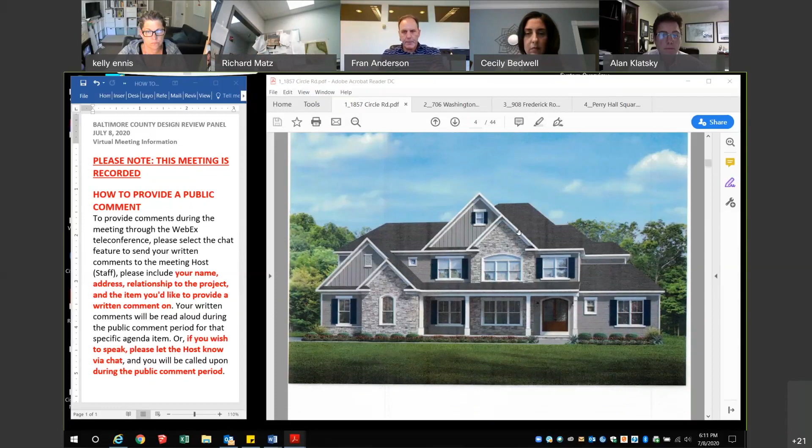So this is the view from Circle Road. You can see the driveway at the middle left-hand side of the screen. The driveway comes into the property, and that house was the original house on the property.

One thing I would like to point out is that as part of the minor subdivision and all the requirements Baltimore County is requesting, we are planting about 50 trees in this area as a forest buffer from the road to the stream, which you can see in that little dip. It's a very, very small stream, but that whole area is going to be planted with trees. So I can't imagine you'll ever see the house that's actually being built on the property because of all the screening that's being put in.

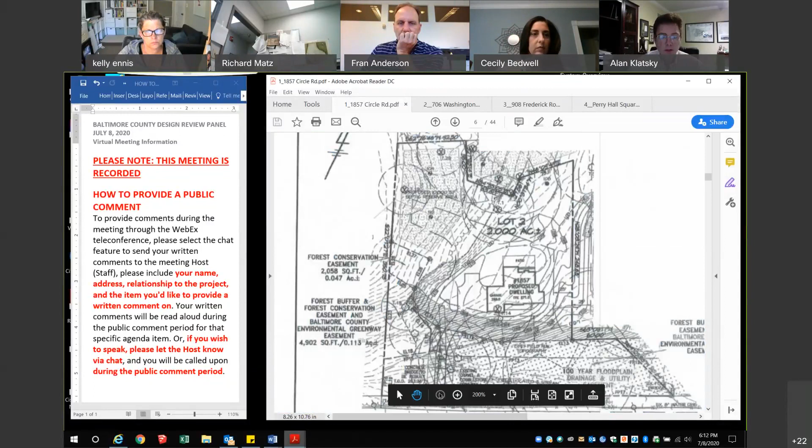Next slide is just a blow up again of the same thing.

Then we go to the house plans. I don't know if the panel has any comment about the plans. I know that you all had an opportunity to review. So again, we have very nice articulation, some arched windows, beautiful front doors, lovely shutters.

You can keep going, Martha. The garage will be entered on the side of the house, on the left-hand side. You can continue, Martha, and then we get into the floor plans. I don't know that the panel has any interest in the floor plans. It's a lovely house. You can continue through, Martha.

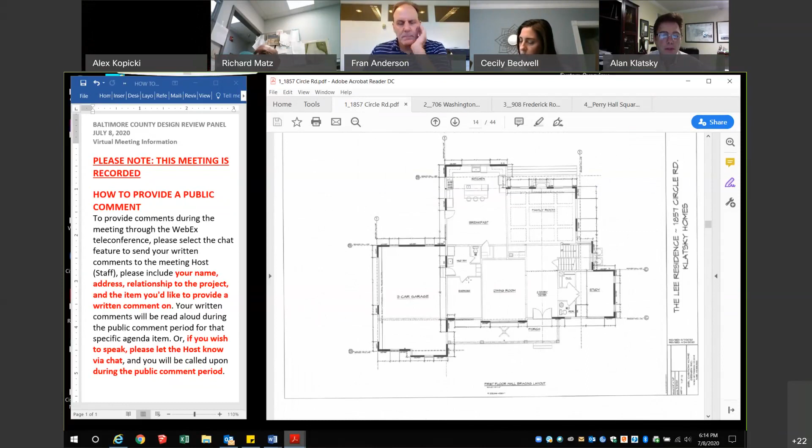Basement plan. Next. First floor plan, covered porch. Next. Upstairs floor plan. Next. Some more detail about the ceilings. Next. Again, just more detail. You can skim through the rest of this package, Martha.

Then the landscape plan was actually prepared by the homeowner. She worked for a landscape architect firm. So again, there's going to be a tremendous amount of planting as part of the forest conservation plan. And she has thrown in all the various colorful plants along the front of the house.

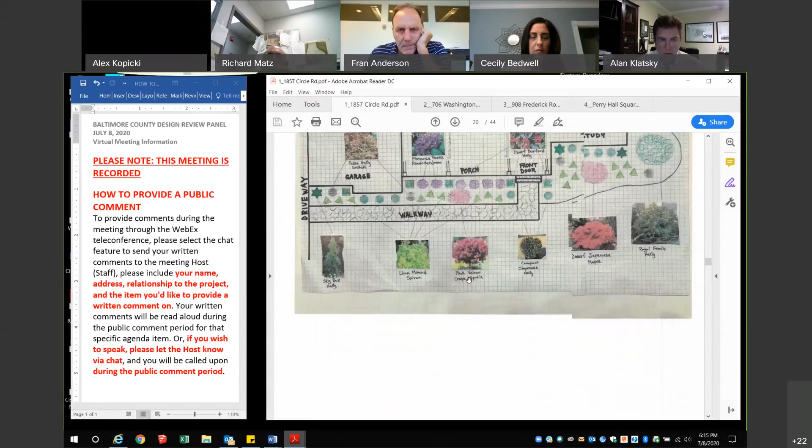And the siding is a HardiePlank type of siding. Here it's just shown in the traditional lap, although we're doing the shake, but this shows the color. It's known as granite gray. Next. This just shows the style of the siding, the board and batten, and then you can see at the top the shake style. So it's going to be a mix of those two types of siding.

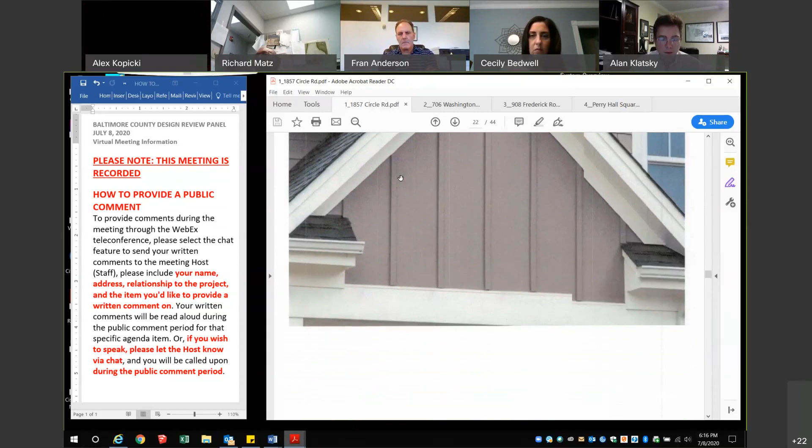And then next shows the design of the shutters, not in that color. The color is shown on the next slide, that will be the color of the shutters. And the next slide shows what the garage doors will look like.

And the next slide shows the roof shingle. They call it pewter gray. It's a very dark charcoal color. Timberline, high definition. It's a beautiful shingle. I've used it many times. Next.

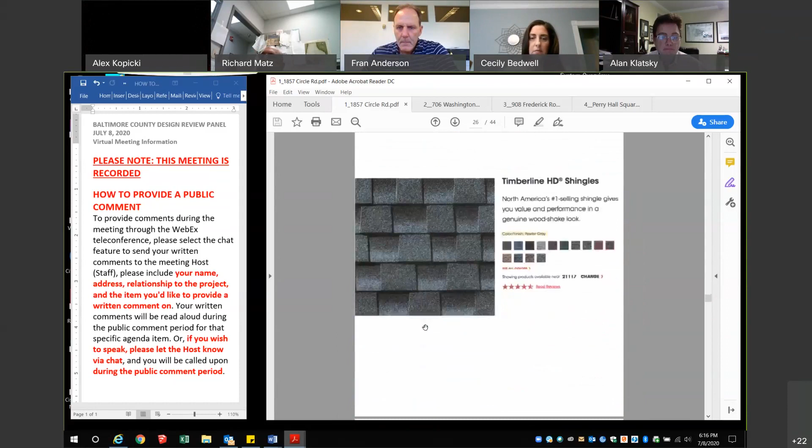So this is the picture from my neighborhood, and it shows what the property looked like when I bought it. You can see the 3 homes and the 3 addresses of 1857, 1859, and 1861. Again, all of that has been demolished. It's all cleaned up, beautiful grassy lawn. And in the end, there will be a subdivision line breaking it into 2 parcels, one which is 2 acres and the other which is 4 acres.

Next slide is the same county map, maybe a little more clear as to where the structures were. The 4th little tiny structure all the way at the left was the 2-car detached garage.

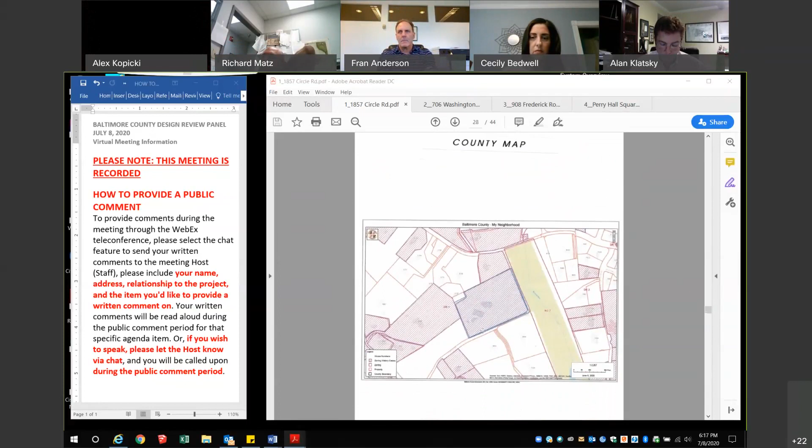And the next slide shows the relation of the property to Circle Road. The black line is Circle Road, meandering all the way around. And I'm showing 1857 as the really dark hatched area. The other area right below it along that green is going to be 1861. So that's the address that currently exists as 1861.

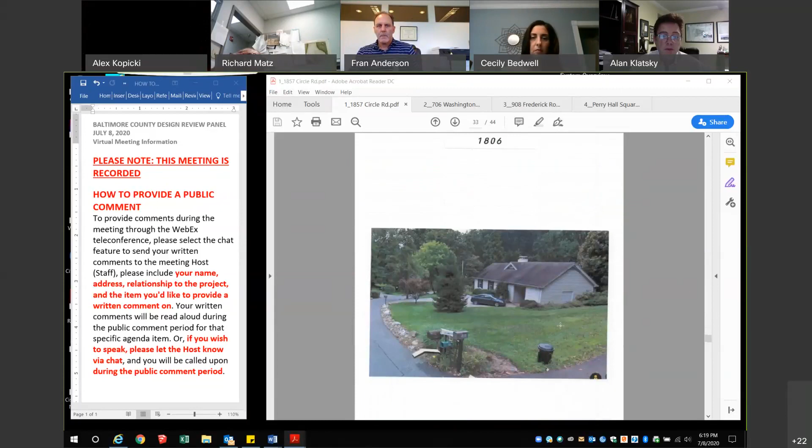And then the rest of the package just shows some of the homes along Circle Road, which is a true hodgepodge of all kinds of different styles and time capsules, homes that were built at all different times. There are some very, very large, magnificent homes, and then there are some very, very small, modest homes. So it's really a mix. I can't say that there's any one type of architecture that is predominant on Circle Road. It's a tremendous mix.

And that concludes my presentation. Alan, thank you very much. Martha, has anyone signed up to speak from the community?

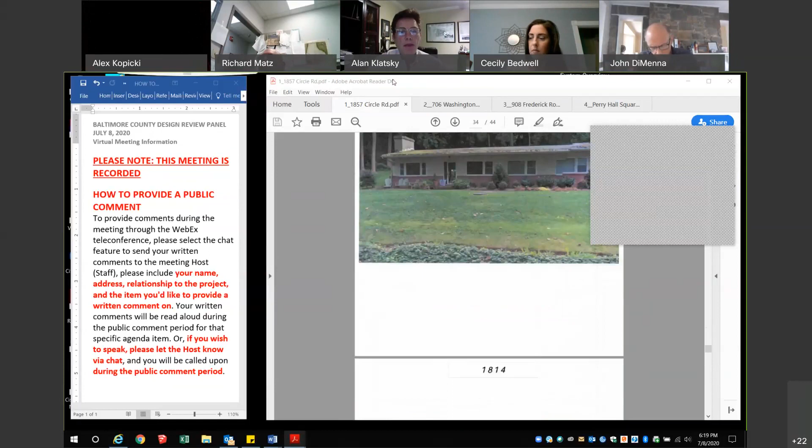John, we don't have any speakers as of now signed for this particular project. If I may interrupt, I did, through Peggy, invite everybody to meet with me at the site so I could go over with them what was proposed. There was one neighbor that did come and was very happy with what was being done and said they would be very supportive. Of course, I sent out notice to all the adjoining neighbors and neighbors across the street who are not adjoining, telling them about tonight's meeting, and I sent them the entire package.

Thank you. With that, I'd like to turn this over to Fran, who is our residential reviewer. Fran, do you have any comments you want to start off with? No, Mr. Klatsky stole my thunder. I was going to say, as I usually lead off, I got an email from Peggy at Ruxton Riderwood, about the meeting he referenced, and Peggy's email confirmed that there were no comments that any of the neighbors had for the project. So there's nothing there.

I guess my only question, two questions. I assume on the 4-acre lot, you're going to build an additional home there. Is that the plan? Yes, I'm going to be submitting that. I didn't want to confuse the neighbors and you, the panelists. I will be submitting that for the next meeting.

Okay, great. Well, we'll deal with that - I mean, they're large enough lots, I don't think it's an issue, but we like to look at siting and scale and that kind of stuff, but I don't think it's a big deal. And the only other question I had, and maybe you kind of addressed this, is did you have sort of a consolidated landscape plan that did cover the trees you talked about planting? Because you did assert that there was a lot of screening from the road, and not that I have any real issues with the house, I just wondered if you did have a consolidated landscape plan showing the plantings.

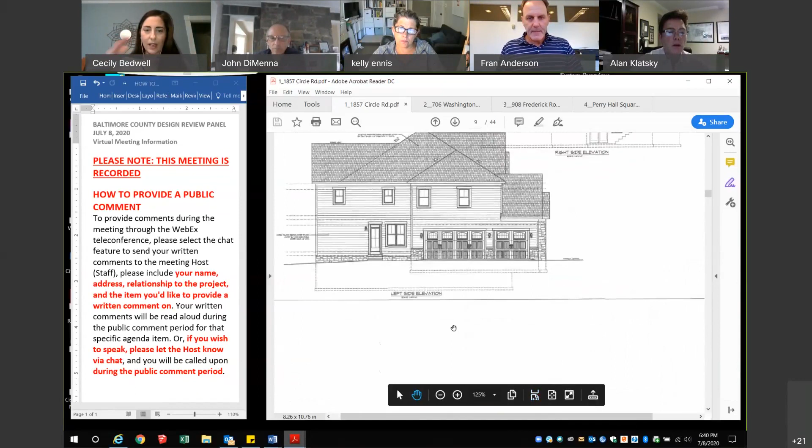Martha, do you think you could go to that page that shows the garage doors? Sure. Currently, the transom windows of the garage doors - oh, that one shows them. Okay, maybe you might have to zoom in a bit. I think they show them curved. Yes, you were talking about the colored photograph that I showed of garage doors. Well, and this elevation also shows the transom windows have a curved top. Curve, yes. Right, which I think is only appropriate when the opening is curved. I would suggest a straight top transom. And it's just a consideration, not a mandate.

So John, do we need to summarize that, or are you okay with all that? I think we're okay. Martha, did you get everything for your notes? John, someone else is taking notes during, but we also recorded meetings, so I think we're good to go.

Okay, with that, does anyone have a second? I'd second that motion. All in favor? Aye. Aye. Any opposed?

Very good. Mr. Klatsky, thank you very much for your presentation tonight. It was very thorough, well done, and thank you very much and good luck. Thank you. Appreciate your time.

Okay, with that, we're going to move to our second project this evening, which is a presentation for a student housing project at 706 Washington Avenue in downtown Towson. With that, our presenter, you have the floor.

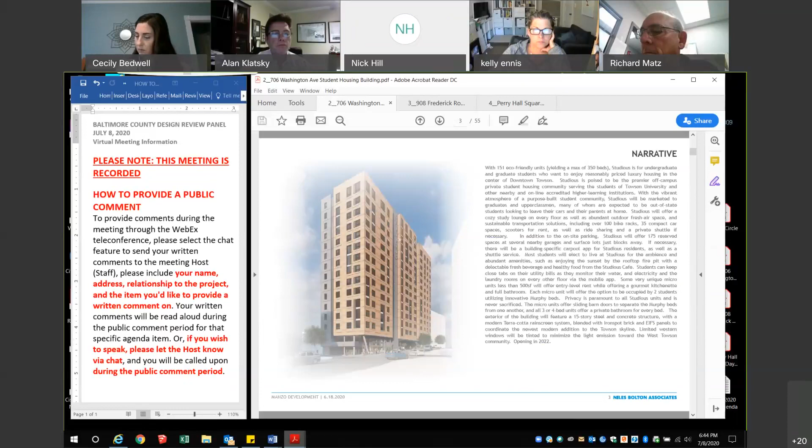Mark Manzo, the owner of the property, came to us asking us to look at a student property for a private property outside of Towson for the students. We came in with a program of around 350 beds to hit, about 150 units or so, within that DT district.

I believe there were some presentations previously. Mark, if you'd like to speak to some of the movements you've had with the community and the outreach you've had, go ahead and speak to that, and then I'll go through the design itself. Sure, I'm Mark Manzo, the developer.

I've owned this property with my family since 2004, and we've had a lot of back and forth between designs, and we finally determined that student housing was the best fit. We had some contentious meetings at first that we resolved.

We've reached an agreement with the community, and we've reduced the height by 25 feet. We've reduced the bed count by 27%, from 482 beds to 350 beds. We've reduced the ceiling heights from 12 feet to 9 feet, and added a lot of setbacks along the perimeter of the site on all four sides.

We've added more terrace space and cutouts to the building, pulling the building back from the edges on Ware, as well as on the western edge. And we've exceeded the downtown Towson goal of 5% open space.

We're really happy with the feedback we've gotten from the community. They seem to really think it's a beautiful design, and we do too. I've changed architects to Niles Bolton because they're a top-notch student housing designer. I guess I'll let them take it from here unless there's anything else I need to address.

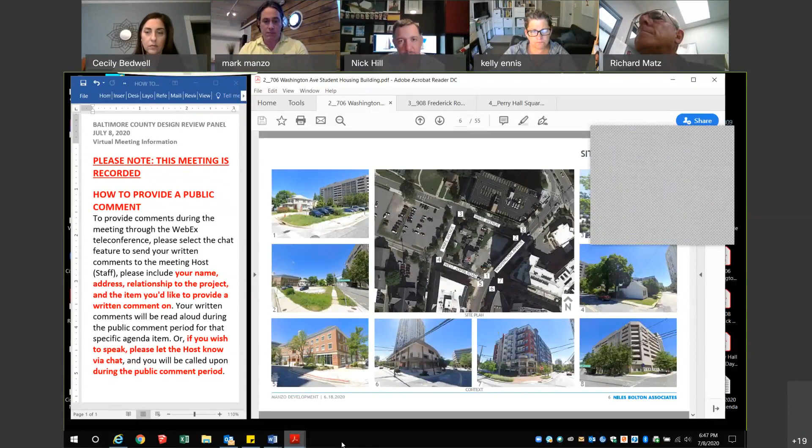We have about a 10-foot grade difference between the northeastern portion of the property and the southern portion. That allows us to tuck in some parking from the Joppa side, and also come in on top of that off of Ware into another parking location. This also allows us to connect to the neighboring parking garage across the street.

These show the two entrances, one off of Ware Avenue for the vehicle, one off of West Joppa.

We have the services for the building located, the transformers off of Ware. We also have the fire control center and the trash off of Ware. We have a cafe off of the corner of Ware and Washington, and then we have the main secure entrance a little south of that, west on Page, where it says airlock - our main secure entrance for the cafe and the concierge.

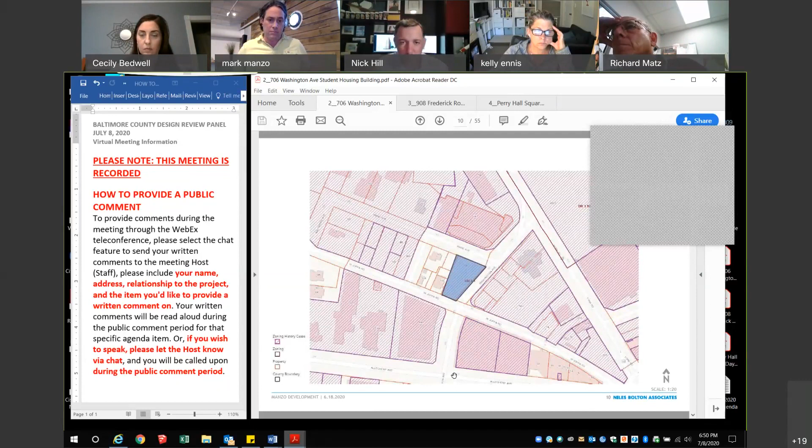Okay, next. Just our zoning map. We can go past through here. Next.

To the Ware access. A lot of parking would be across the street. Mark, correct me if I'm wrong, but you have 75 parking spaces and 100 parking spaces in 2 other decks. Is that correct? That would supplement this.

Yeah, the Baltimore County Revenue Authority is telling us we'll have 75 across the street at Tolbert or in one of their other garages like the library. And then the Allegheny Avenue garage, which is about a block away diagonally, is giving us another 100. So we have 175 off-site and 35 on-site.

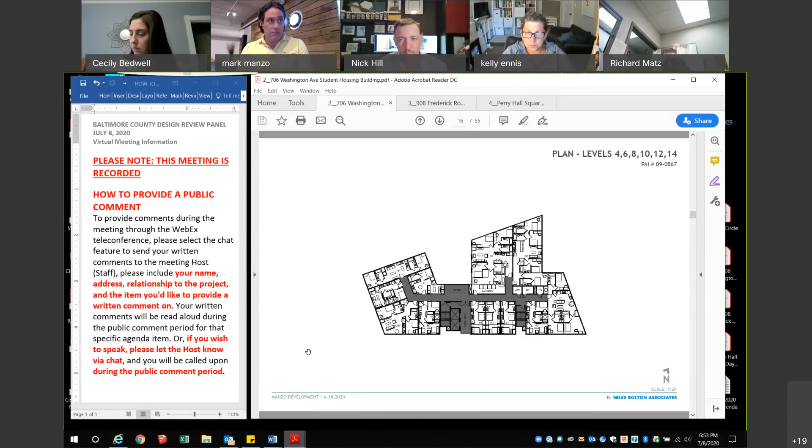So you'll see at the top, levels 4 through 14, alternating floors with the laundry, and these would just be our typical floors. We have a mix of micro units; some could be shared or they could be single occupancy with the utilization of Murphy beds. We have 1s, 2s, 3s, and 4s also, so a very typical situation for student housing, but with the shared laundry. We do have 1-to-1 bed to bath parity unless we double occupy one of the micro type units, but right now it is a 1-to-1 bed to bath. Next.

You'll see on every floor, this one now has the lounge. So where we don't have the washer dryer, we have a lounge scenario to try to give the students somewhere to go to on every floor. Next.

As we come up to the roof, we have a sky lounge area looking out west and east, and then a planted and active green space, an outdoor space for the residents up on the roof. Outdoor spaces are very important; everybody needs that getaway from the indoors. So I think we're trying to maximize it as much as possible on this site. Next.

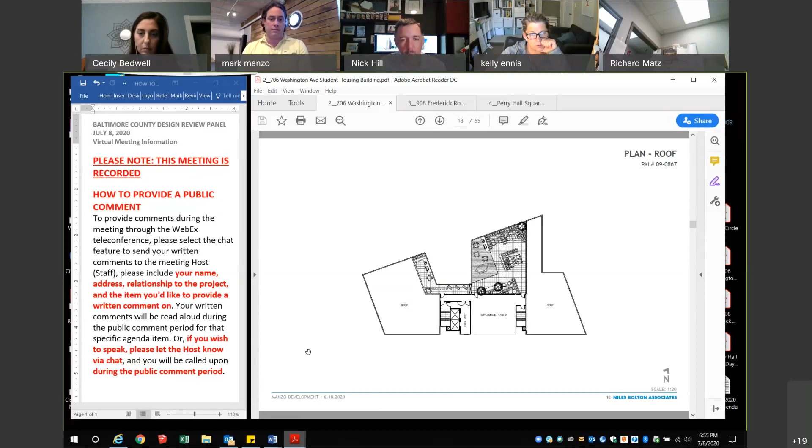So we can go into the elevations. Next page.

Materiality and massing wise, we really tried to break down the building into different vertical elements instead of one big wall of one color and one material. You'll see along every elevation at least two stacks with a nice base. We also tried to vary the windows so it didn't look so monotonous with just a bunch of punched openings.

So we do have some mix of window wall and regular punched glazing elements. The terracotta color right now is a mix of terracotta and an EIFS product with patterning and coloring to match. The window walls have an off-white aluminum slab edge color cover, and the windows would be a charcoal gray, same with the storefront. The white portion to the right would be an off-white EIFS panelized system.

And you can see the heights here, and the heights will be different varying from which street they're on. So we're looking from here right now.

So the east elevation is probably the biggest, the longest elevation that we have. We have the three towers, but with the vertical circulation we've put some glazing in there to give a break between the solid elements. The brick is an iron spot brick, which gives you a nice shiny, sheen, kind of mica type look to it. It's very beautiful, I've used it on quite a few projects and it's very nice looking.

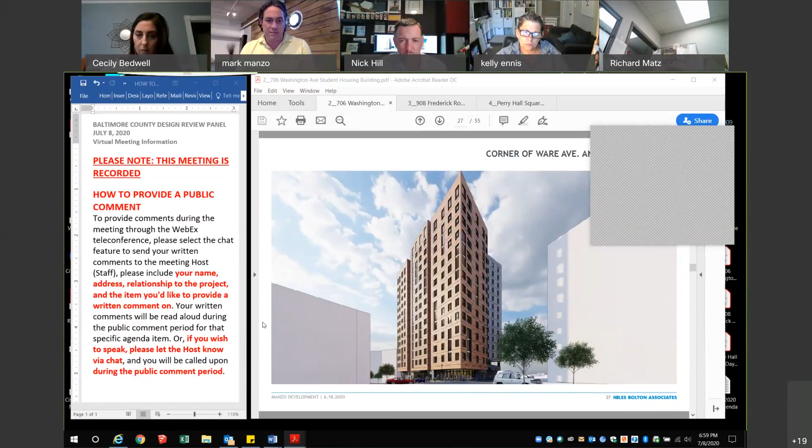Just some different views. You can see how the building is hanging over, especially in this view, and when we get into some of the lower perspectives, how the building gives cover to that public realm down below with the seating and everything. We can enhance that with lighting.

The western view, and you can start seeing the green activity roof.

This is a good view to see the size of this project in relationship to the one across diagonal.

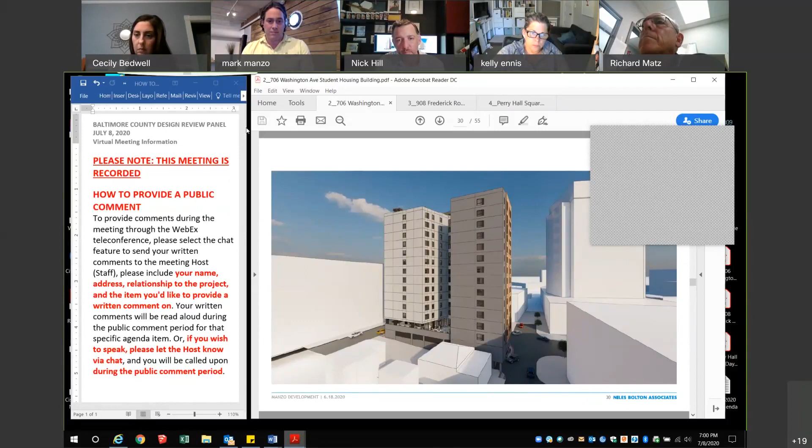This is the corner from Joppa where we're looking up into this communal art space, really canting that column to keep it within that chamfer on the corner, and bringing in the brick patterns on the streetscape, really activating these corners as much as possible, while trying to push the vehicle and push some of these service areas back so they're not a dominant thing, as they can be sometimes. Really trying to activate these street corners, especially on Washington.

You can see how we've started lifting the brick out of the ground plane to create these knee walls, because we do have quite a bit of fall. We need to be able to plant those and put some steps in between in different locations, which will help give a nice three-dimensional expression even along the pedestrian walk and sidewalk on Washington.

We've chosen to move one of the entrances to the property down a bit from this corner. We're trying to really activate this corner with people. We'll have some structure there because of the nature of this property, really trying to give a view into this cafe and into this public space. The main entrance to the building will be just in and out for students, so we reserved this area for that congregational type space, allowing the cafe to spill out into the corner versus blocking it off with just a direct entrance and exit.

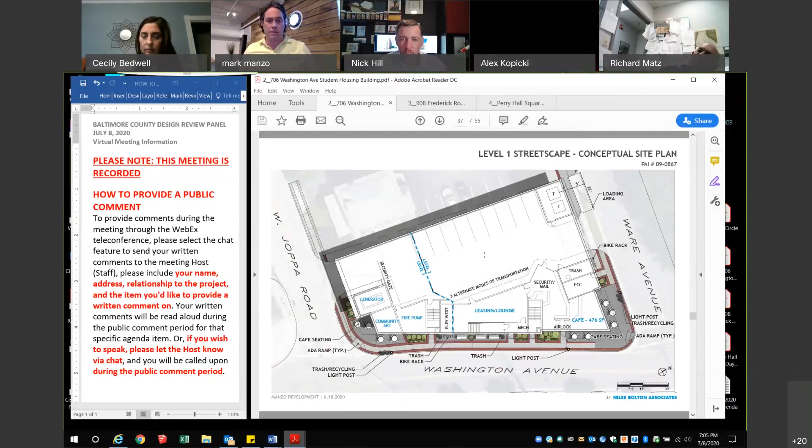These are some more detailed landscape plans as we move up the building for the amenity spaces for the residents. We can provide all of the species of plants and that information at the next level.

This is the rooftop lounge - semi-private and private areas, group seating, fire pits, grilling stations, a lot of the very typical things that student properties possess, but I think it really takes this property to the next level.

A quick rendering just to give you the experiential feel.

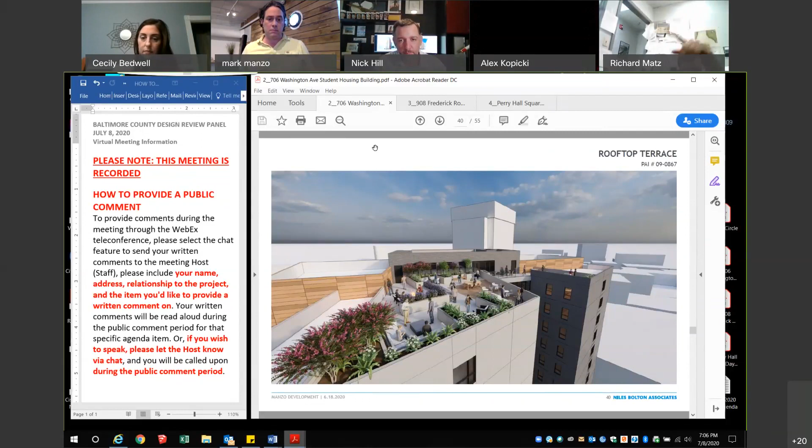We'll flip through the unit plans real quick - this is one of the micros, another micro, then we get into the 1-bedroom, 1-bath units. A unique 2-bedroom unit along the property line, 2 bed 2 bath, our 3 bed 3 bath, and then our 4 bed, and another 4 bed.

Now going to the materials. We're looking at the terracotta NeaCera product up to around level 6, then transitioning to a more cost-effective product that may have a bad rap but has gotten a better name these days, especially since it's a drainable system now - a panelized EIFS system that gets the same panel gestures throughout. The iron spot brick in the middle is probably just a typical modular brick. The iron spot is where you see the panelized EIFS off-white - that's one I just completed at Temple University called the Vantage, also with iron spot on it, turned out wonderful. Above that is the off-white EIFS you see in the big field. The colors are really just terracotta, off-white, and grays - natural tones.

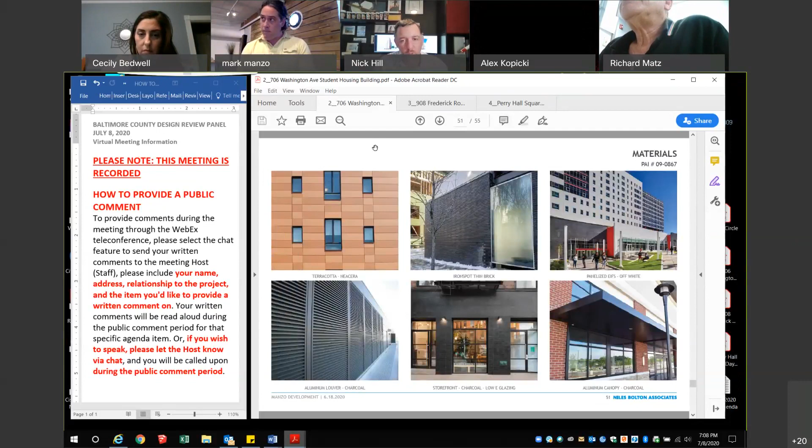These are the blow-ups of the different signage pieces, really trying to integrate them into the architecture as we can, whether into the storefronts or into the curtain walls. We can note these, put a keynote showing where they're at on the building if needed, and maybe on the elevations - just trying to meet the requirements here.

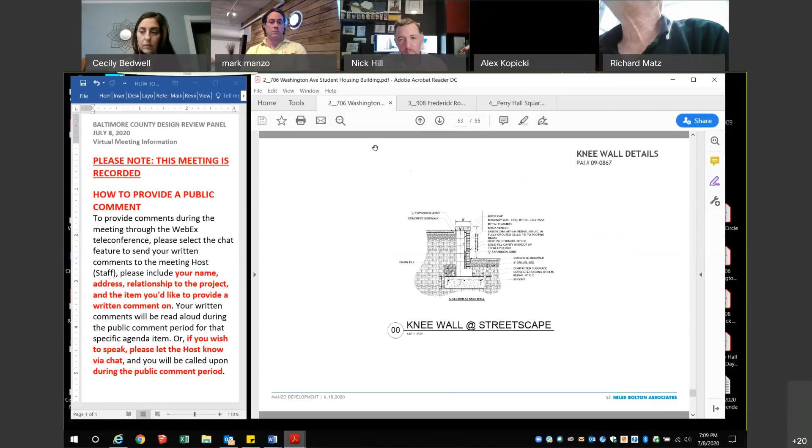So next, just some details for the knee wall streetscape showing the use of brick as the face material and the veneer. I think we have a few details of that as well. But with that, I believe that's what we have for the presentation this time. Thank you.

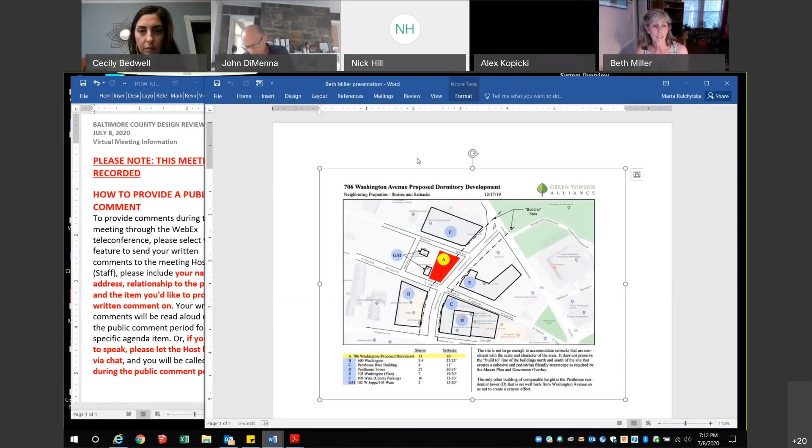If the sidewalk is not widened and the massing is not changed, the developer needs to provide environmental and aesthetic relief from this building through a combination of green walls, green roofs, and/or solar panels. A relocation of the 3rd floor terrace and light well to the Washington Avenue facade would provide some relief to the imposing massing of the current design.

The recommended revisions are substantial. In the interest of transparency, we request the DRP ask the developer to return to the DRP for additional review before making your final recommendations. Thank you for your time.

I'll make some other comments. I have a few questions and requests. I think it would help us if you had plans that actually showed the minimum dimensions of the sidewalk, because I can't tell. There are places where you've got planters measured to the front of a bench or something like that. It would help if we knew the actual dimensions from curb to knee wall, from curb to planter. It looks like in many cases it might only be 5 or 6 feet wide, but I can't tell.

Another thing that would be helpful is to provide dimensions on the plans for the width of the stairs. There's a couple places it looks like there's an opening in the knee wall that provides a stair into an entrance. They look incredibly narrow, but I can't tell.

Some of the elevations you have here, I don't know if it's just the rendering, but what is the dark horizontal line in between every single floor? Is that just the computer rendering, or is it intended to be something? That's a panel joint. Okay.

I also think it would be helpful for us to have a plan that shows exactly how you've met the 5% open space. Again, I can't tell. We have a development plan that's been produced, and Mark, correct me if I'm wrong, if y'all submitted that, it shows us at 6% or a little over 6% open space. Okay, I think. Yeah, that's on the DRP package.

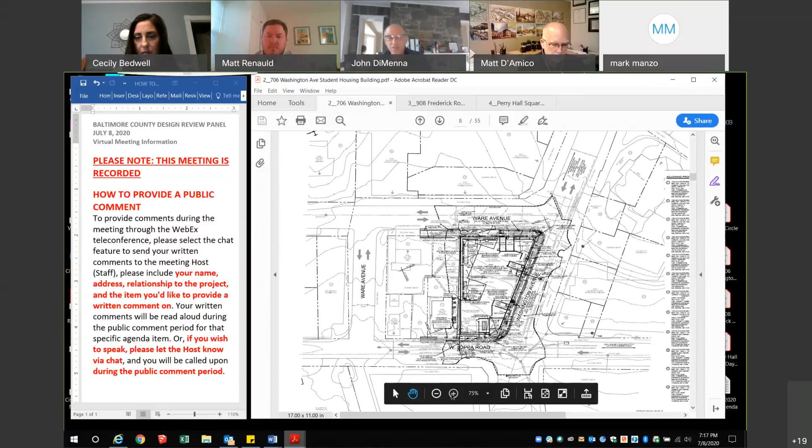Let's see. Those were some of the things from looking through my questions. The loading area on page 9 was labeled as 5 feet wide. That must be, that can't be right. So those are some drawings and some additional information that I think would be helpful to have so we can better understand some of these things.

So I'm just going to go through my comments and follow the downtown Towson district guidelines just to be consistent here. In terms of sustainability, my understanding is that it will meet LEED Silver. Is that correct? Yes, that's correct.

In terms of block configuration, there's an item in the guidelines that says corners of blocks should be given specific design consideration, emphasizing unique architectural features and entrances, and it says it again in building principles and architecture, item 5 in the guidelines. I want to talk about that for a moment. The Washington and Joppa Road intersection is really the most important corner because a lot of people travel north on Washington Avenue leaving Towson, and because of the angle in the road, that's a very, very prominent corner.

I think at page 31, if I wrote it down correctly. I'm just going to ask if there's a possibility of studying a couple of things. If you look at the rendering, there's a lot of stuff going on. It's a bit clumsy, quite honestly. An angled column, this heavy brick cantilever thing coming out, and then things pushed back that create dark space. It just feels unresolved to me.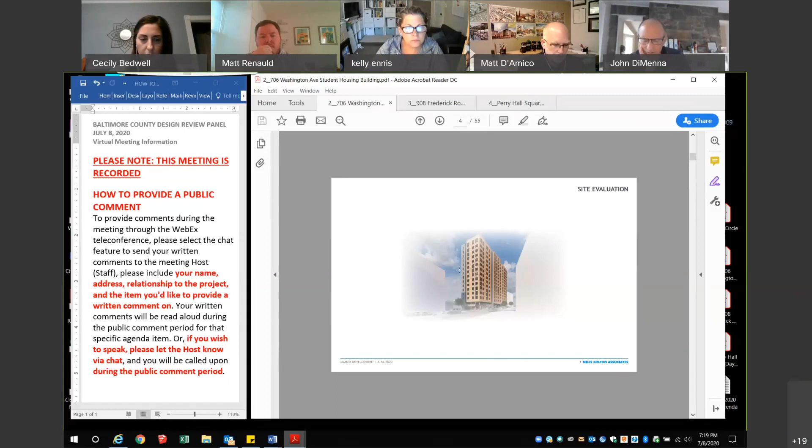So I'm wondering if there's a way to pull the community room out farther, wrap the glazing around the entire corner, 2 stories high. Maybe there's a way you could push the generator room back, or rotate it, or adjust the fire pump room or something. I think it's worth studying to see if there's a way to wrap that glazing around that corner 2 stories tall. And the brick cantilever piece, which is the second level of the garage, is rather heavy. I wonder if that could also be pushed back so the glazing comes in front of it, or could it be thinner with just a railing above?

It's rather heavy in my opinion. So one of the things we had to address is this chamfer along the right of way here. That's why we pulled that back. We're just trying to hit those extents as much as we can, so that's why that was pulled back the way it is.

That also happens at Ware and Washington. We have that chamfer that we can't go over, so that's the reasoning why things are pulled back there. And those are 2-story elevations. The glass is a 2-story expression.

I still feel like that intersection feels a little unresolved. There's an awful lot of things going on. The angled column feels forced. That brick cantilever piece coming forward, that's between the first and second level of the garage.

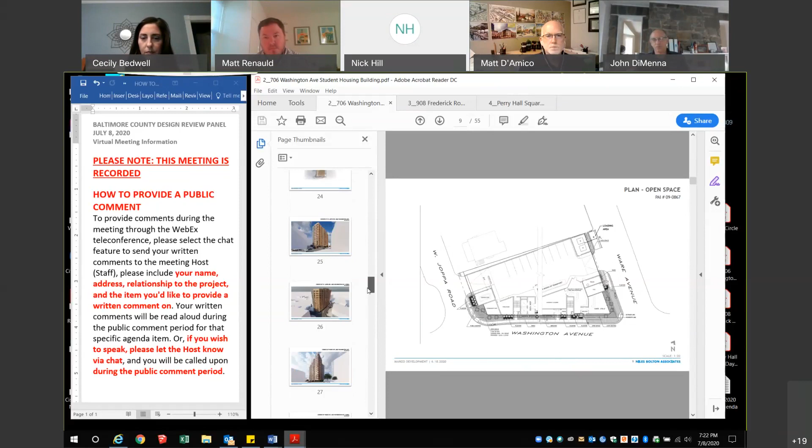So I think that corner needs some more study. The Ware corner is much better. I just feel like the floor height feels awfully squished there at Ware. I don't know where the underside of the slab is—that's the area I was talking about. It just feels cluttered and unresolved to me.

So I finished commenting on that. The Ware intersection, I think it just needs to be taller. That cafe space needs a taller ceiling. I don't know where the underside of the slab is, but if that could be lifted up, it just feels pinched. The scale, the proportion just feels awkward to me.

So that's block configuration and addressing the corners. In terms of the open space and the streetscape, it'd be great to see how you're meeting the 5%. I think this plaza here—I don't know what the material is, I'm sure you'll develop it more—but putting the brick band against the curb and then letting the inside of that all the way to the building feel like a plaza feels right to me.

And I think something similar could be studied at the Joppa Washington Avenue intersection. Having that second layer of brick banding inside the curb just further accentuates the narrowness of the streetscape. I just think that's something you should study—if there's a way to eliminate that, at least at the intersections.

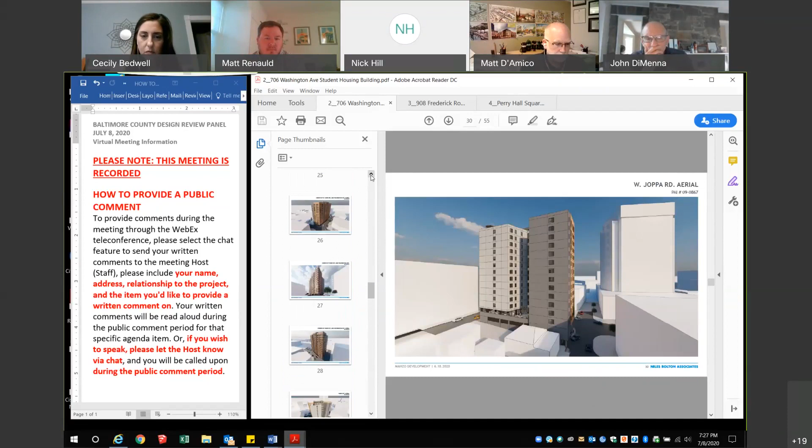The facades, the window patterns and fenestration, just feel very regular, and I know you're trying to break it up. It could be more. That's a mechanical louver, like a PTAC unit, so that's why it's stacking with the units. That louver is a functional thing there, but I understand the comment. Maybe there's another strategy you could come up with. I think your thought of varying the windows, having these vertical groupings to break it up and create interest and rhythm, is a good one. I just think it's not coming across as bold as it could.

I had a couple questions about the south elevation facing Joppa Road - how does that transition to EIFS? On the north side it turns the corner, and I saw in your rendering how that transitions from the Neocera and the EIFS to the gray EIFS, but on the south-facing elevation on Joppa, it looked like there's a window, and a metal vertical panel in between. Is that recessed or coming forward, or coplanar with everything? It's recessed - the two stronger materials are popping out. How deep is the recess? I've only got it about 6 inches right now.

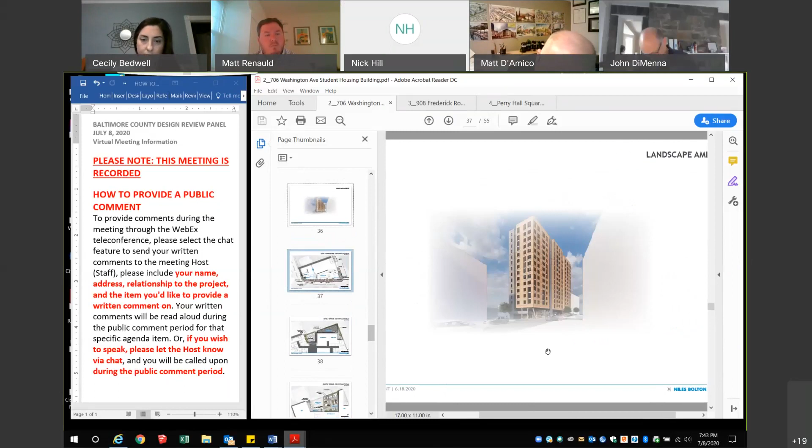But that's to the line, to that build-to line that we have. So to the property line, there's no setbacks on this with the DT. So we pushed the pedestrian level back to work with the plan here, and then overhung the rest of the building to give us a buildable footprint for student housing type units.

Joe, are you finished? Yes. Okay, Cecily. Okay, thank you, everyone. Cecily Bedwell.

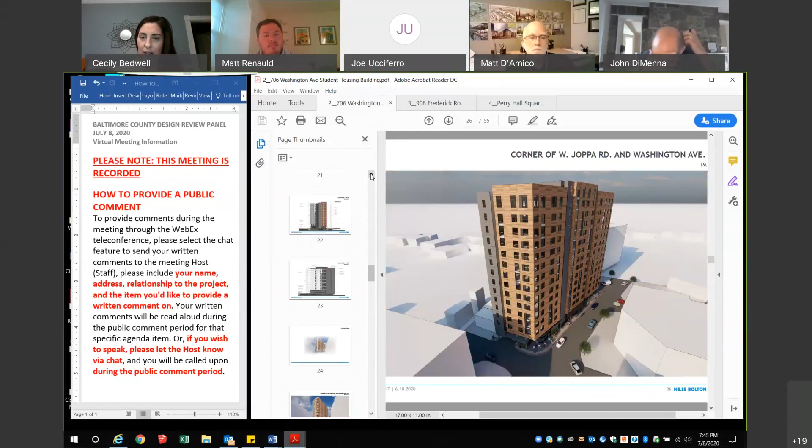I think Matt covered many of the same comments. I'll echo the break in the EIFS to the other materials. I think there needs to be a very clear stopping and starting point, and not try to match materials that are very difficult to match, especially the Neocera. I think that would be extremely hard to match in EIFS and not really true.

It'd be better to pick your points at which that more expensive material can be used, and otherwise transition. I like Matt's idea of the base of the building being the dark brick and being consistent, and then maybe where you have the slots of other color changing to be a shade or two lighter, to really try to differentiate the different materials rather than try to match, and in the end, I think, fail at achieving a good match. I think there's some design opportunities to use those materials.

Also, I thought Matt's grouping of the windows was very interesting. I do echo Matt's concern, maybe I think it's where the floor plates are, where there's a white band. I think you said maybe those are PTAC units, but I'm not sure if that's correct.

Anyway, if those vertical groupings of windows could be consistently that darker material or dark punch to read, it would be good to emphasize that. The other point that has not been made yet - maybe go back to that page, page 34, I think shows it - the sidewalk materials should run across the entries, the vehicular entries into the garages. So here, yeah, this shows it pretty well.

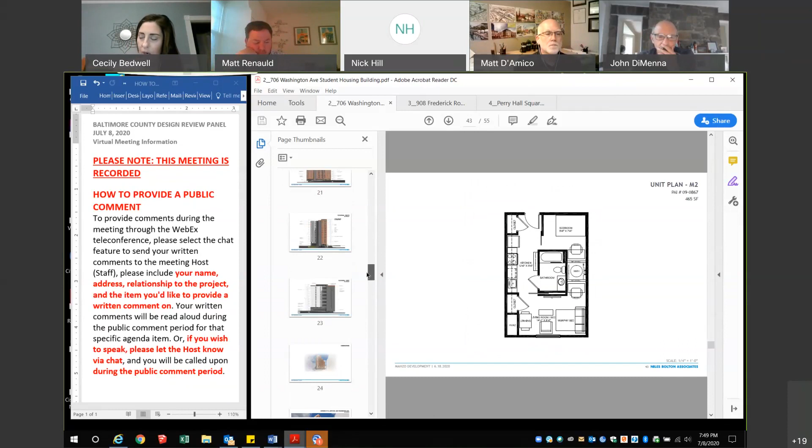I agree also with the brick mezzanine. That whole corner on Joppa really does need to be cleaned up and strengthened. My notes kind of echo Matt's, but the canted concrete column, that brick floating element, it just feels very cave-like, not very welcoming. Whereas the cafe corner does feel welcoming. I don't share the same concern as Matt does about the height, I think that's probably tall enough up at the other Ware corner. But this corner just feels brutalistic and not super welcoming.

If you're on this image, my other comment was it'd be nice to play with the soffit colors. It feels like a missed opportunity - I don't know if you can use the Neocera on the soffit, but it seems like that wants to not be a white color, but something that feels like that push-out volume is one form rather than just a typical soffit.

Can we go back to talk about the Joppa corner and have a little dialogue on that? Well, I think we're going to need to get through our comments, we have two more.

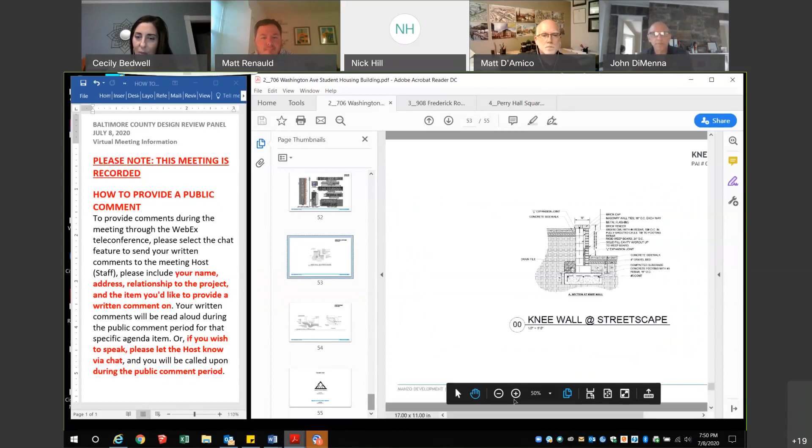That's fine, that's fine. My last comment is the knee wall has a brick cap, and those are just prone to water and spalling issues. It'd be nice to rethink that. You have a lot of materials here that you're using, I think something else could be done there rather than that - this kind of brick cap where we see everywhere that they fall apart after a while. Yeah, that's good to know. In any event, those are my comments.

This is John DiMenna, I'm going to have my comments now.

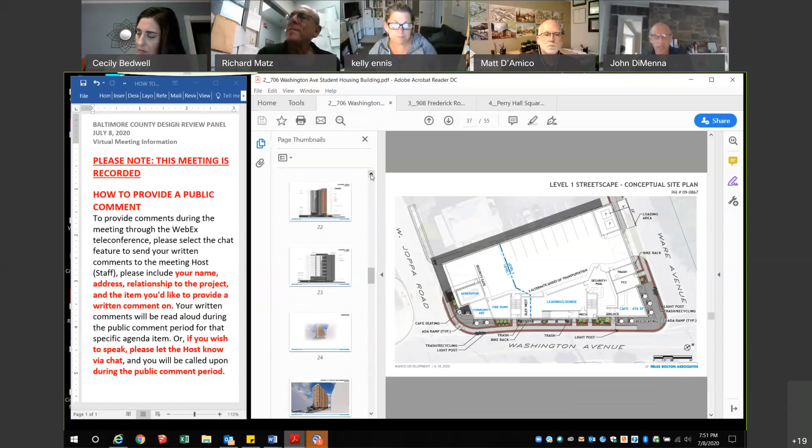I go back to the first comment Matt made as he opened his whole dialogue, because I agree 100% with him that it's a very aggressive size project on a very crowded site. My first reaction was, I really feel like as a developer, taking advantage of a lot of the things that the DT district gives you when developing the project, but I don't think we're getting a whole lot in return. I think the entrance for a building of this size is way understated. I struggle with it because the reality is if I'm a handicapped student coming up Washington Avenue, I can't get into the Washington Avenue area without going through the airlock at the cafe. It just seems a little awkward, the whole sequence. It's very understated.

The overhangs and going out to that building line, while we have a little bit of a wider sidewalk below, well, it may be good for the site. It's not really good for the impression driving down the street. It makes for a very dramatic building, but I'm not sure what the streetscape experience is going to be.

The open space provisions of the downtown Towson district are very clearly written that the open space is to be accessible to the public. So my interpretation is the open space that's on the upper terraces isn't really open space that the public gets the benefit of.

This then gets reinforced back to the site being very crowded. In addition, the step backs for the upper level open space, which creates some relief on facades, I think—I'm not sure if it was Kelly or Joe who pointed out—it would be really nice to have some of that relief on the more prominent facades where most of the people are going to see it.

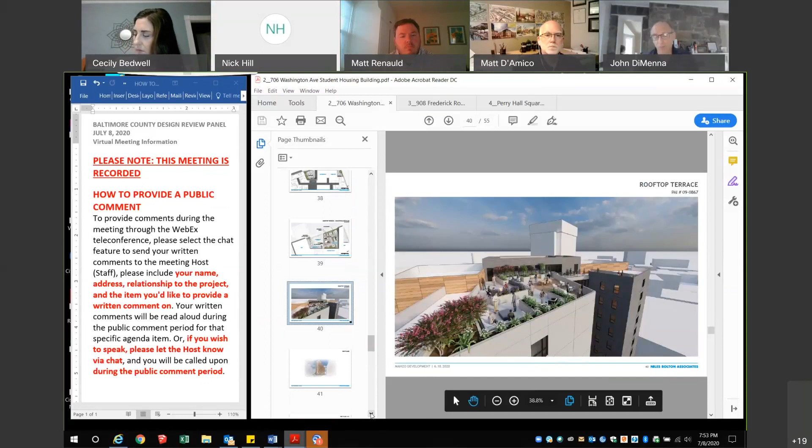The reality is pedestrian traffic is really coming to what is the least developed portion of the building, which is where that art space is. That really does beg to be where the entrance wants to be. And I believe that was also one of the comments that planning had in their review.

Beyond that, I definitely echo just about every comment that other members of the board have made. So do any members of the board have any other comments?

This is Donald. I wanted to add. I'm sorry, Donald, I missed you, didn't I?

That's okay. I wanted to say that I agree with virtually all the comments that have been made. I think it's a difficult site. The geometries for the student program have been worked out, and I think if that were the control, it's been worked out pretty well. But I agree that so much of Towson, and particularly with the new zoning, expects a great deal more of what happens on the streetscape.

Restaurants opening out, closing streets to get more pedestrian traffic at certain times for the restaurants on adjacent streets—it really does concern me, and I think it needs to be restudied fairly dramatically, what happens along Washington Avenue and at the intersection of Joppa Road as well.

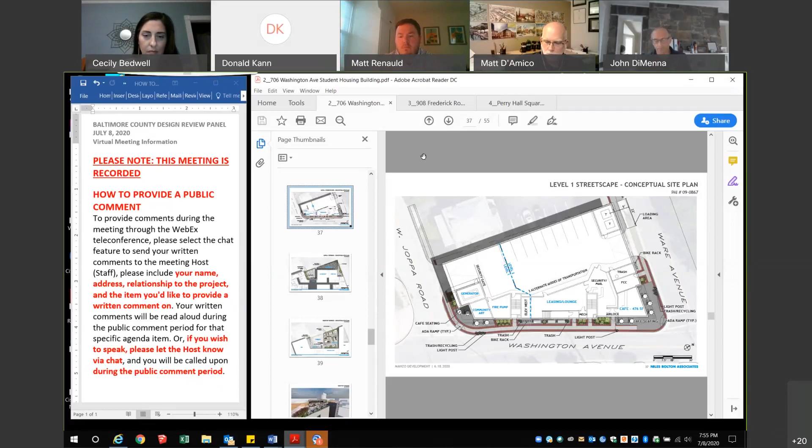I'd like to see some thought given to making a statement of the entrance, which has been said, but also trying to find a way to get some relief to the facade on Washington Avenue, where perhaps some of the open space could spill out to the street.

I think it's really a missed opportunity to make such a heavy looking building coming down so close to the sidewalk and over the sidewalk. I really think there are opportunities to revisit that and make it a much better project. And that's it. Thank you, Donald.

Well, we have a lot of comments that were brought forth. I think all of them, based on what I've heard, are going to require the developer and the team to really go back to the drawing boards and restudy this project.

And I think what I'd like to do is, one, we need to make a motion on how we move forward for discussion among the panelists. I think our motion should be for the developer to come back and seriously address the comments that were raised in the meeting.

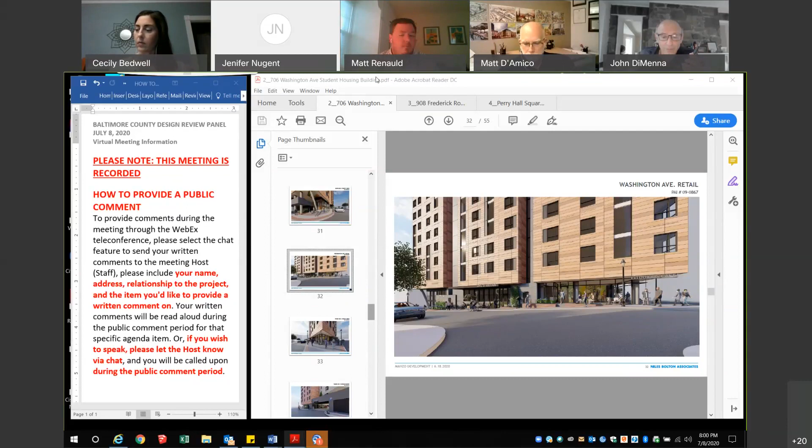So if I could suggest, John, as chair, I was hearing from the panel members as they went through their comments. I think there was some general consensus about several items. I don't know if you were sensing that pattern yourself, but particularly the pedestrian scale aspect, the widths of the sidewalks, addressing these corners more, making the building seem less dense, less dark at the street level. Those are the first few that come to mind, but you want to make a motion to have them come back and relook at the design, and maybe some guiding places to start, some things the panel noted through their overall comments.

I agree with those, Jenifer, but also, like you mentioned, the dark overhangs on the underside of the building. Well, that's just a rendering too, right? I mean, if it's a lighting requirement, that's easy to address. Mm-hmm, and again, it's subjective, it doesn't relate to the development plan. Correct.

All right, this is Matt. Let me take a stab at this, and I'll try to follow the design guidelines, going guideline by guideline. In regards to block configuration and site design, we're asking them to restudy both corners of the Joppa Road intersection and the Ware intersection. With respect to Joppa Road, it's to reconcile the angled column, wrapping the corner with glazing, making that more welcoming, and studying the potential for that to be an entrance. With respect to Ware, it's studying the possibility of raising the height of the cafe space.

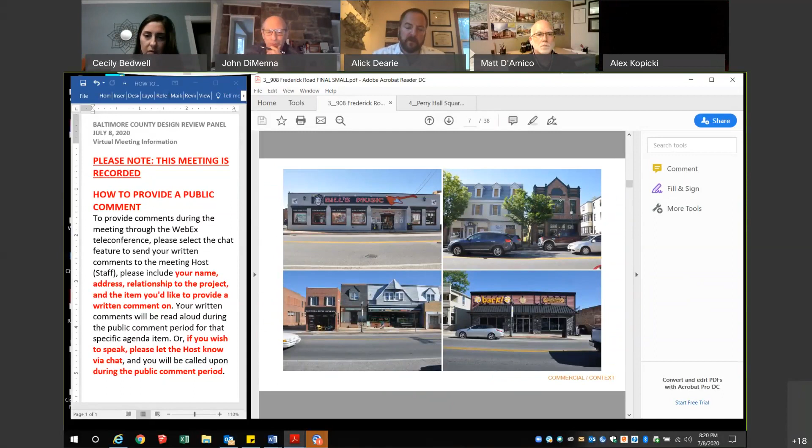Okay, well then I think I'll turn it over to Alick Dearie and let him get through it and address the comments as they come up. Okay, thank you very much.

Happy to be here. Martha, can you go to the next slide, which looks at the context? Our fundamental approach in working on this project was to really understand what it would mean to put a commercial office building program with retail on this street, on that site. We spent a lot of time in Catonsville, walking up and down Frederick Road, and visited some of the dining spots, trying to understand what it's like there and what makes Catonsville interesting.

Our sense is that there's a lot of idiosyncrasy - lots of different kinds of materials, color, fenestration patterns, massing patterns and forms. Our building tries to reconcile that, but there aren't necessarily lots of obvious clues, so we were looking for subtle clues. I'm going to try to make this pretty quick and then answer your questions.

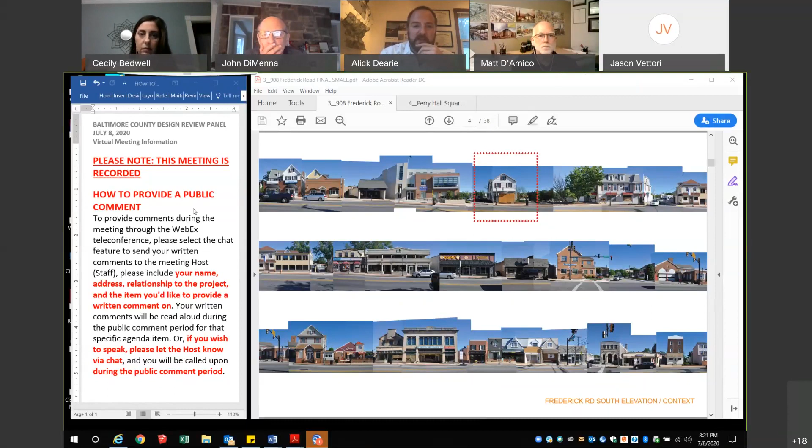So the next slide, Mark - you got slide 5. This is just continuing down, this is the other side of the road. If you go to the next slide...

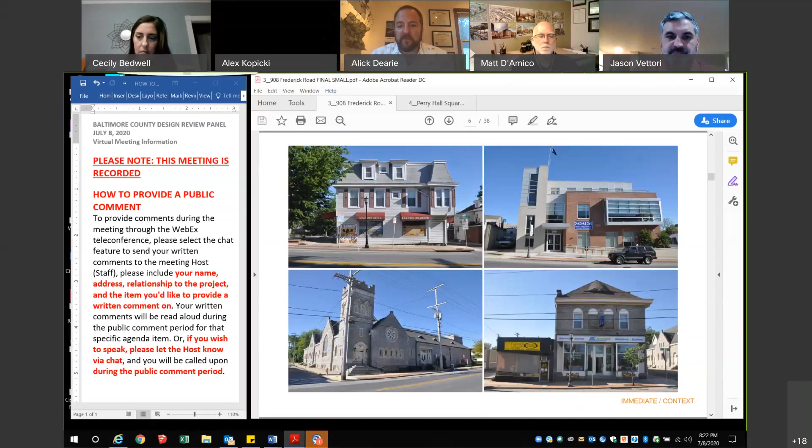These buildings represent our immediate context. The building on the top left is the liquor store. The building on the top right is owned by the same property owner. We don't see this building as trying to create a campus that mirrors that building - in fact, we spent a lot more time trying to understand materiality as it relates to the church across the street and some of the other stone buildings, and we think what we've come up with reflects all of that in a way. Next slide, please.

These are just looking at the kind of retail commercial context, the use of horizontal banding. Sometimes those bands are broken up, sometimes they project forward. The roof lines are often fairly idiosyncratic. Next slide.

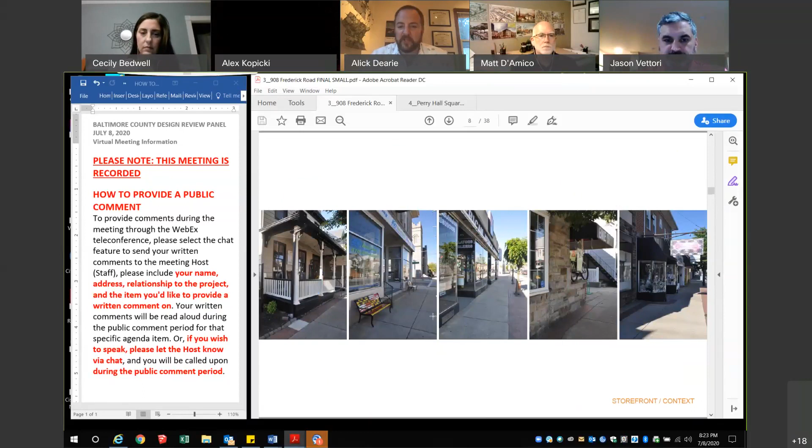This is just looking closer at some of the storefront systems - whether there's a small base, lots of glass, a kind of porch element, canopies, signage. Go to the next slide, please.

One of the nuances we're especially attracted to is there are all these moments - I'm not sure it's exactly the property line, but there are these little slices that create openings or moments for entrance. In some cases they're obviously canopies, but in lots of cases they're actually creating recesses in the surface of the facade to create the entrance. Next slide, please.

So here's the landscape plan. The building essentially is a parallelogram, and we're using the property lines that run away from the street to set that up, then reconciling those slices to create entries by turning the walls perpendicular to those property lines.

We are trying to maximize as much green as we can around the building. We feel we've done that pretty well in terms of keeping the building as narrow as possible. There are two different entrances: one on the street for the retail space, and access from the back into a lobby which accesses the commercial office spaces above.

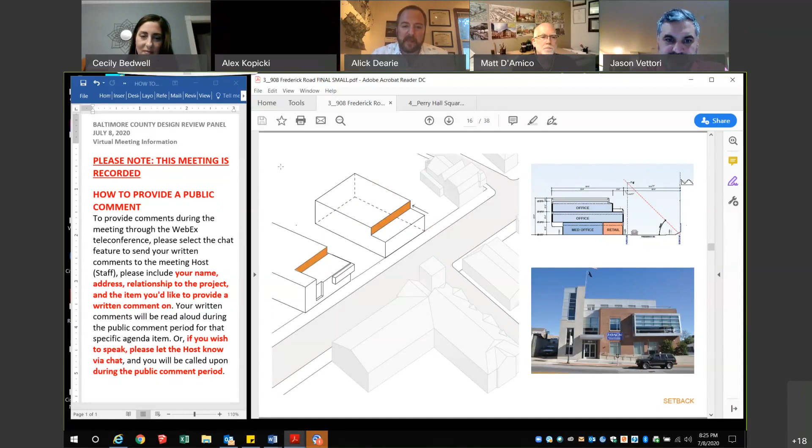So just looking at the massing, and the next slide is really referencing the setback. The next slide mirrors that on the backside and flips it to create an overhang for the commercial office entry.

And then we enter into the back edge, where there's a ramp and some stairs that deal with some grade in the back.

This is just showing you the core, so you can understand when we get into the elevations and massing where those sidewalls are treated as party walls, and we push the core up against the edge on that side.

This is just looking at the fact that in this context, it's fairly typical that the sidewalls, or party walls, are treated with fairly simple punched openings.

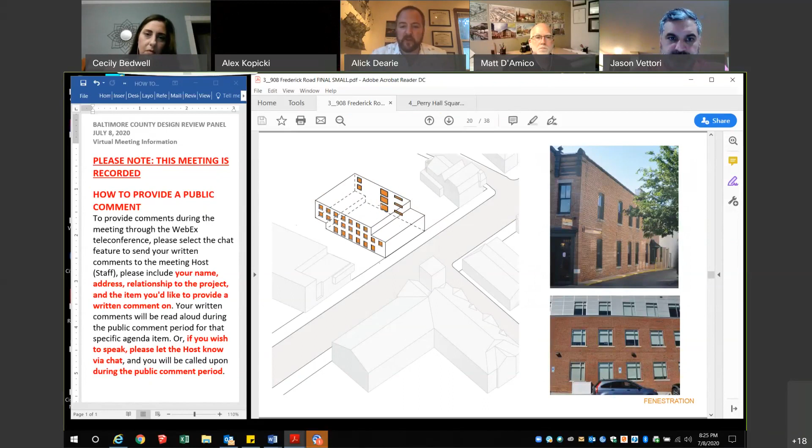And then the street surface is treated in a very different way, often with more glass and kind of a rhythm to it.

And here you see, and you'll see this better in the renderings, this idea of using this little slice to create some interest on the surface of the facade and also to create the retail entrance.

This is just to show that we are well within the height requirement and the canopy. We are setting back, even though it's not necessarily required. We do think that at the scale of the street, the 2-story makes a lot more sense, and setting it back to create some amenity for the 3rd floor office space has value.

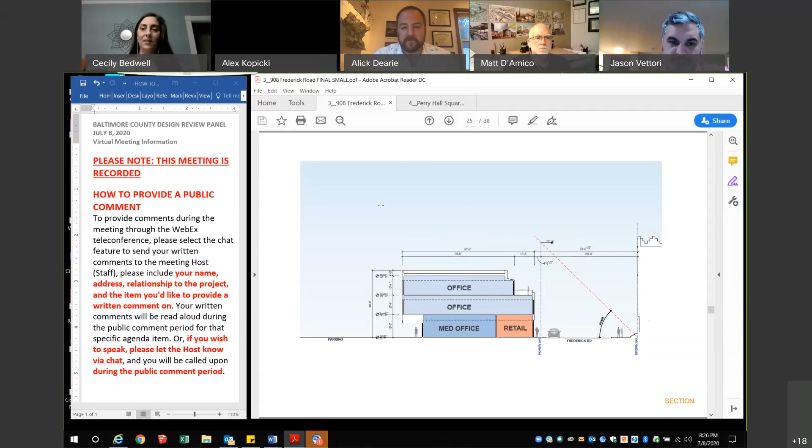This is just looking at materiality. Our immediate context is a bunch of stone buildings. We actually went out on site with probably 30 different brick pallets and put them up against the stone, particularly on the church, and are also thinking about the relationship between the gray stone and the beige accent materials.

So when you zoom in on that, we have 2 materials. Scanning or photographing these never quite does it justice, but the brick actually closely matches the stone on the church and some of the other stone buildings around. And we're using a very light anodized bronze aluminum for the accent materials, to play off the buff color stone elements.

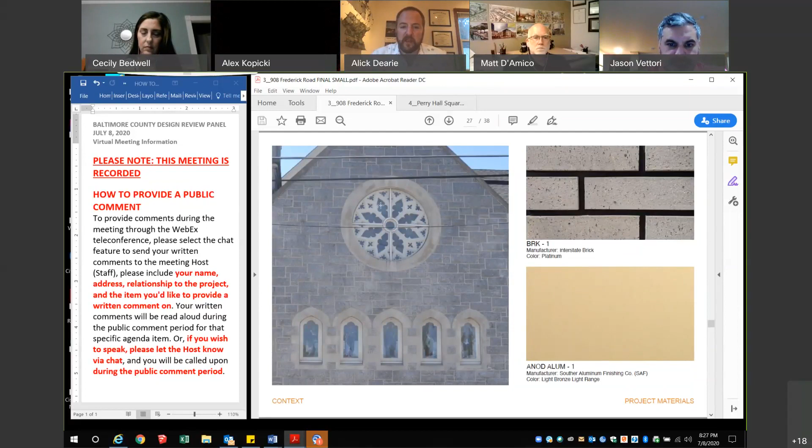And the next few images are looking at it in 3 dimensions. This is coming from the west, heading eastbound. This is where you're seeing the elevator lobby in the corner as the corner on the 2nd floor peels away, and the setback to the terrace on top.

Next view, this is coming the other direction. You can see the little slice that occurs to create the entrance to the retail space and the overhang at the back for the retail or commercial office entrance. And this is the back entrance itself.

I think the rest of our slides get into the elevations. I don't know that we can jump through them, but they do show signage locations and get into a little bit of the detail and materiality. We are planning to have a brick pattern - not changing the material itself, but changing the texture or alignment of the stacking of the brick to create a kind of banding through the window zone on the sides.

But that's really it. I think we have the plans at the end in case you want to get into that. Essentially it's a core that's stacked, and on the second and third floor it has fairly open office space at the moment. It's a core and shell project, so we haven't gotten into the layout of that. So I think that's it from my standpoint - happy to answer questions or listen to comments.

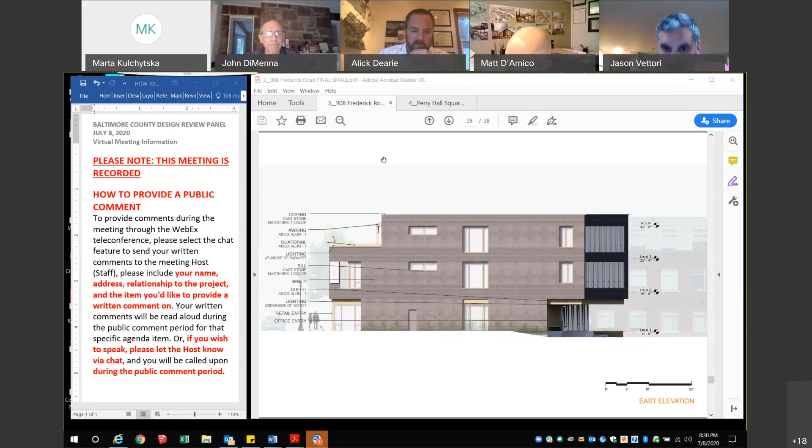Thank you for all your hard work, you guys. I had no clue you spent so much time in the evening going over these projects. I really commend you for it. I am representing One Winters Lane, that small duplex totally wrapped with both entrances, on Winters Lane. I'd just like to speak briefly about our concerns with the water flow and the landscaping plan, and also the light post. I want to make sure how tall that light post is on the corner. I don't know if you can see on the side drawing where One Winters is.

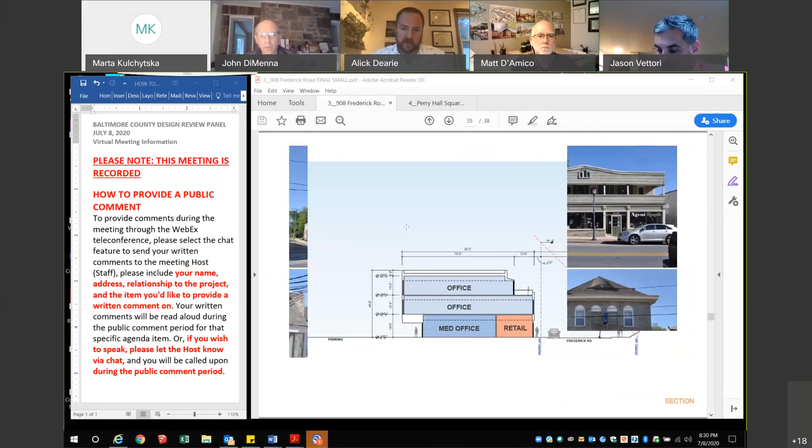I don't know if none of the plans really showed the placement, but it's immediately south of the exit that goes out to Winters, and immediately north of the liquor store. It is a duplex, and currently I didn't see any cuts of the asphalt landscaping section that adjoins the property line, I guess that would be your north-south, right behind One Winters and right behind the entrance to the retail lobby.

I don't know if you can expand that or see it, but the site plan is probably the best plan, if you have a landscaping plan. Marta, if you go to slide 12, that's the landscape plan, maybe that's clearer.

Yeah, okay, that's a good plan. Winters Lane, excuse me, number 1 and number 3 Winters Lane, is that unpaved section on Winters Lane. That property is totally surrounded by blacktop, as you can see, and Winters Lane on the east side. In 2018, during the flooding in Catonsville, we had about 8 feet of water in our basement due to the runoff of the existing parking lot behind the medical center.

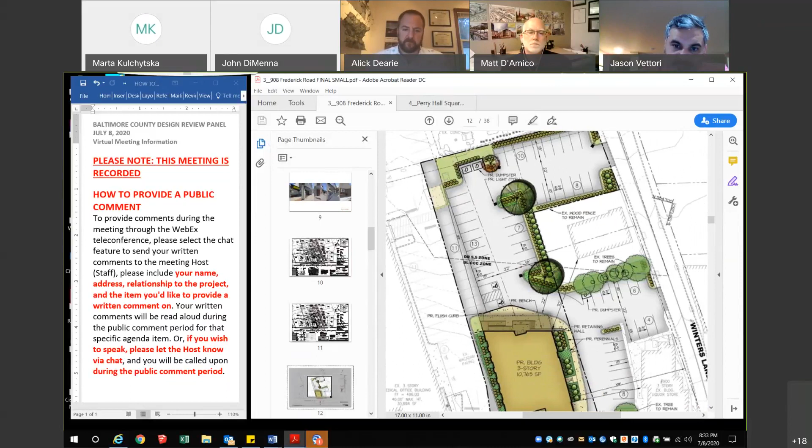Also, there's no section in that landscape island between the 2 islands, the landscaping strip that runs along that north-south property line, right behind number 1 and number 3 Winters Lane. There's about a 3-foot retaining wall there right now, with asphalt basically sitting on top of that wall without a curb. So with this green area now, what happens? What happens to that existing retaining wall? How do we deal with the water, or how is that wall being built? I didn't see a section for that.

So we are definitely concerned about another major water problem going into 1 Winters and 3 Winters. I don't know if this is the correct forum, but I tried calling Baltimore County storm management and couldn't get anybody there. I would like to see some kind of curb cut behind the island on the north side as you go out to Winters, and also another curb cut or island cut that will help the water flow from those curb lines, so it doesn't have to dam up along the island and work its way around the island out to Winters Lane.

That's a major concern. The retaining wall at the landscaping planter area is another concern, how that's being dealt with to relieve water as it goes through this green area.

Where does it go on the existing retaining wall in the back of these two homes? That's a second concern. The other concern is the light post right there - it's going to be shining into the second floor of the residence, unless it's the proper type of downward lighting that won't have a lot of spill going into the windows. So those are the major concerns. I would also like to see more green to buffer between this commercial area and the residential area. Those are my major concerns.

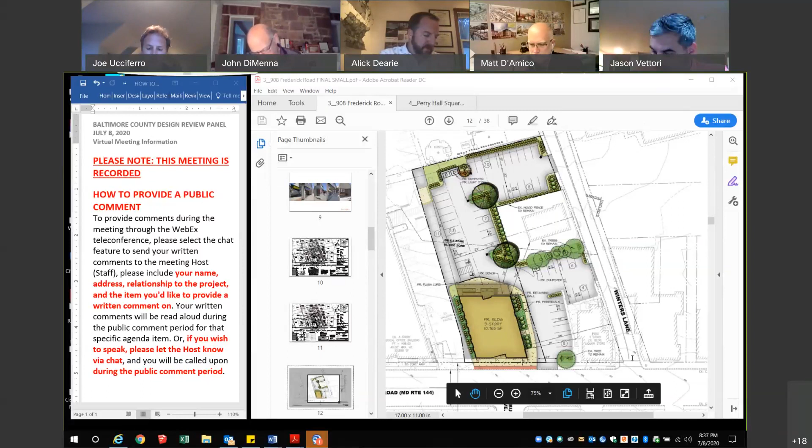Sure. Good evening, everyone, Joe Ucciferro. So to speak a little bit about Mr. Sebastian's comments about drainage - this panel does not review for stormwater management or grading, and we will not make recommendations in terms of curb cuts. However, the county has many levels of review that they go through - a stormwater management concept, perhaps development, and then a final. The development plans review reviews grading, so Mr. Sebastian, the county does review for that. They review for water coming off-site from this property onto your property, and they do guard against that. If you want to reach out to the county agencies, feel free to do that.

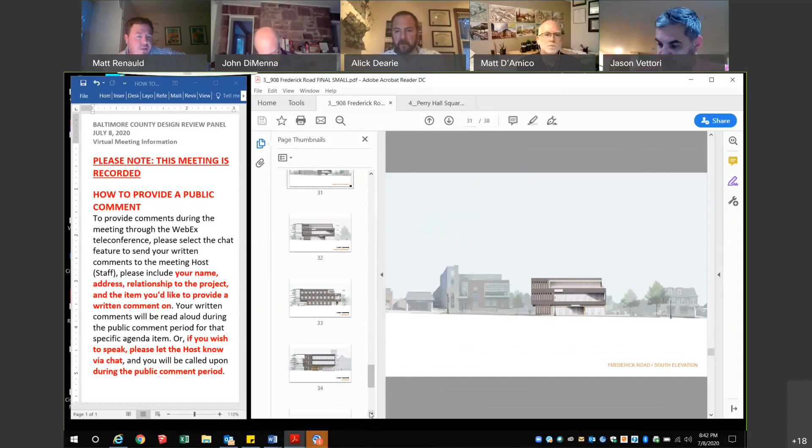The other thing is with the expansion of the parking lot, you're right up against the parking for the medical center next door, so you're completing the parking lot, but there's no way to drive through. People will drive through there because that's what people do, but there's not an actual drive lane there. So it's just something to think about and consider.

Same thing with what Joe had brought up, just the dumpsters, especially that one right at the building entry off of Frederick Road. The dumpster is just right there when you come in. Maybe that could get looked at a little bit more. Other than that, I thought it looked really great.

Thank you, we'll definitely look at that. Matt, thank you. Cecily.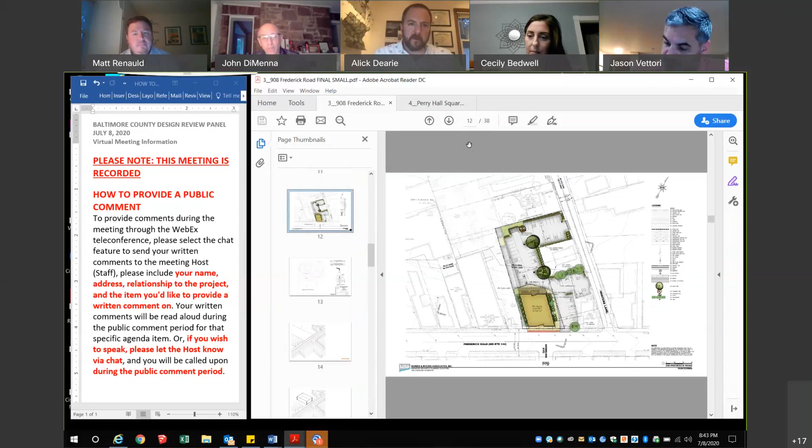Great, thank you all. I'll just echo some of the comments. I think the building massing and detailing, the brick especially, using the pattern brick or rotated brick to give the building some texture and pattern while staying true to the material, is nicely done. The cap on the building is nicely executed, and the subtle moves in massing, the step backs that are a little bit more than subtle, but the subtle chamfering in at the entry.

My main comment, I think someone else mentioned, is the signage. Just wanted to go in depth on that a little bit. I think what's shown now are just sort of these white panels that attach to the different planes of the building where signage is expected. But I'd really like to see some more intent behind that, like there was with the building design, something like pin-mounted letters with halo lighting behind it, so rather than detracting from the architecture it feels like an appropriate addition. I think something that could be subtly applied to the building.

A canopy would also offer opportunities along the front to have some signage rather than just trying to adhere signage to the building. So I think that's something that can be thought through.

I think there was a comment from staff on providing bike racks. I would like to see if that can be looked at on site. It seems like you have enough room around the building to accommodate those. And that's it, those were my comments.

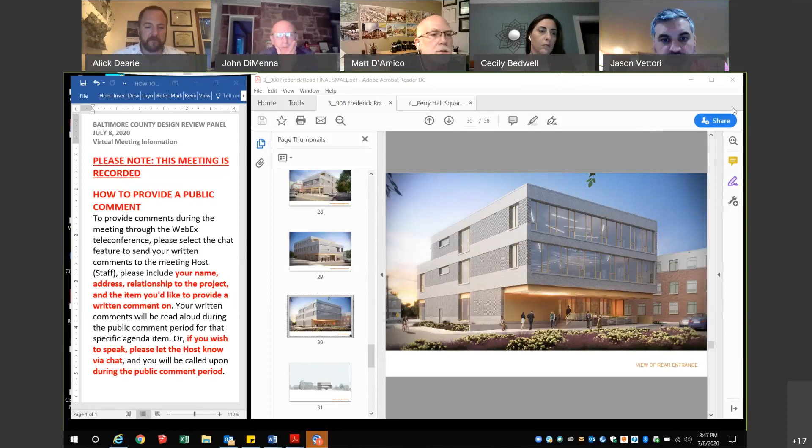There you go, see that where the grade drops off. It'd be nice if that base under the storefront, where the grade drops off, ties into your base, and it doesn't feel like separate concrete. It feels like it's part of the building rather than just slid underneath the storefront.

My only other comment was, I totally get the storefront color and the bronze trying to match the buff. I just wonder if 10 years from now we're going to look at it and go, I wonder if that was a bad choice. I like it, I think it's really cool. Just make sure you're going to be happy with it for a long time. Those are all my comments.

Thank you. Thank you, Matt. And thank you all on the panel for your detail. I have no additional comments.

So with that, does someone on the panel want to make a motion? Don, do you want to give it a shot? Okay, I would move that we approve the project as presented with the resolution, as we were just speaking, that the base of the building as it wraps around the east side, we provide appropriate enclosure for the dumpsters, and the signage package, particularly for the retail, be thought out, and any exterior lighting as well be thought out in the final design. Do any panel members feel that anything needs to be added? To provide bike.

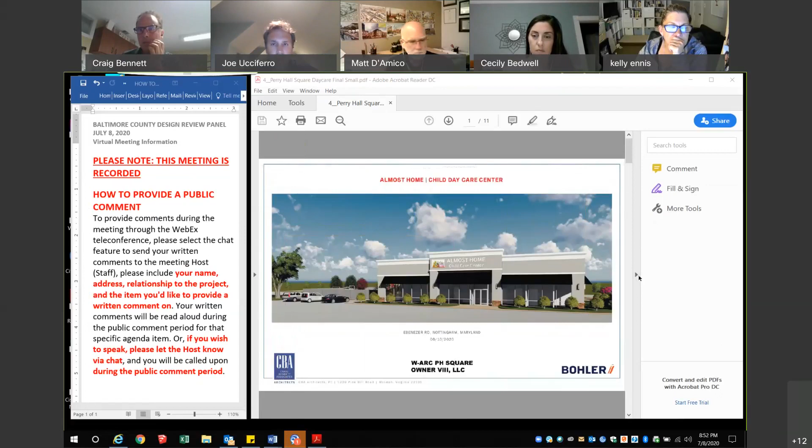May we start? Good evening, if everybody could mute your phones, I'm hearing an echo. Again, my name is Joe Ucciferro, I work for Bohler. With me this evening we have Jen Nugent, who is a program manager also with Bohler, Jonathan Ross, who is the director of construction, owner's representative for Atlantic Realty Company, and Craig Bennett, who is a principal architect with CBA Architects, the project architect. So we are here this evening proposing a daycare facility in Perry Hall.

Marta, if you could go to the next slide please. The location is again in Perry Hall, it is the long, kind of irregular shaped shopping center right at the center of the site. If everybody could mute their phones, I'm hearing a lot of background noise. The road to the left is Bel Air Road that goes north-south. Ebenezer Road is the road to the top, and across the street is Perry Hall Middle and Perry Hall Elementary School. Within this center is Outback Steakhouse, several different retail users and other users. Next slide, Marta.

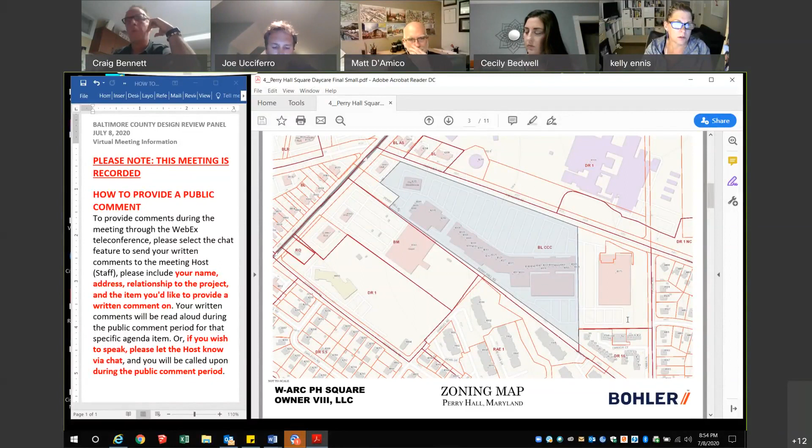Next slide. This is just the zoning BLCCC. These are context photos looking down Ebenezer into the site.

The retail portion of the site was invested over the last couple of years by about $1.1 million. The owner, Atlantic Realty, has done significant facade renovations, signage improvements, and increased landscaping throughout the site to create a more appealing customer experience. So next slide, please, Marta.

This is the black and white site plan that's somewhat tough to read, but at the top center along Ebenezer is the existing parking field. What we are proposing is a 7,200 square foot daycare with about a 5,000 square foot outside fenced play area for children. So Marta, if you could go to the next one, it might be a little bit easier to read.

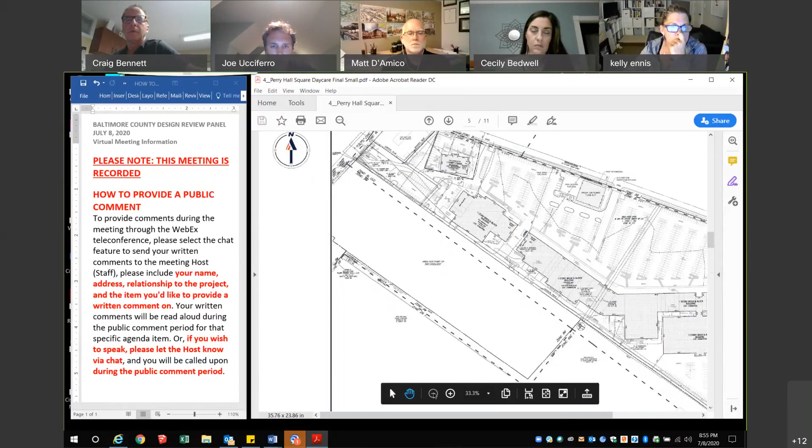Thank you. This should be the colored rendering. Sorry, I think computers start getting tired. I'm trying to go to the next slide, but Marta, no problem whatsoever. I think we're all getting tired here. I'm going to make this quick.

So from a design standpoint, yeah, there's the color one. Perfect. I think we'll stay here for a little bit.

Again, daycare, outside play, really tried to tuck it into the outside parking area, if you will. We tried from a landscape standpoint to mimic the existing street trees along Ebenezer. Further, we tried to mimic the existing parking trees within the islands, and this aerial is not entirely representative. There have been some significant improvements in the center.

So, Marta, as we continue on, I'd like to flip to the next plan, a schematic landscape plan. Again, pretty tough to read. So if you could go to slide number 9, and I would ask Craig Bennett, who's the principal with CBA Architects, to talk a little bit about the architecture, what was designed, and then we'll wrap in 2 more slides. So Craig, if you're out there, you can unmute.

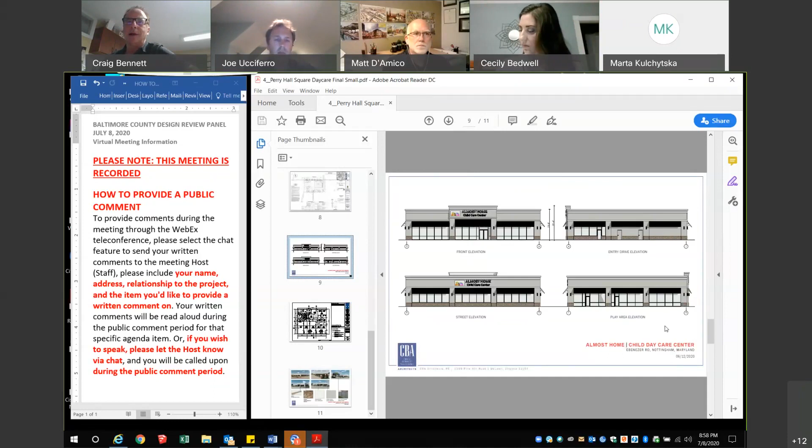So mimicking that same architecture, we carried that onto the daycare center, where it's got cast stone on the exterior with gray EIFS and white trim, mimicking the main shopping center. You see on the slide there.

We also use 4-sided architecture where we have awnings and glass on all 4 sides of the building. There's signage, tenant signage facing over the main entry, which faces the main part of the shopping center. There's also a sign facing Ebenezer.

The child's play area shows on the current slide a gray fence, which is compatible with the colors of the building. We also encompassed the exterior lighting of the daycare center, wall sconces. We did a pop-up at the entry of the daycare facing the shopping center.

I think that's about all. Did I cover it all, I think?

Thank you, Craig. And Jonathan, as I mentioned, Jonathan's the owner of Atlantic Realty. Anything, Jonathan, to chime in with, or we can wrap there and ask the panel for any comments that they may have?

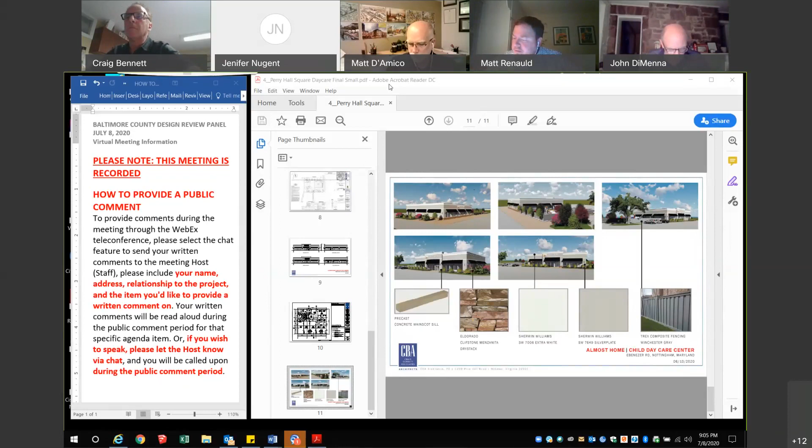Sure, just a couple minor comments. The first is I'm assuming shade will be provided in the play area as part of the equipment, but I think that's going to be important for it to be successful. The second is some of the trees in the parking lot are tilia trees, which have a tendency to drop a lot of junk and litter. I would suggest maybe switching that tree type out.

I think the staff report mentioned the wall material along Ebenezer, so maybe look at that a bit more. And really my biggest comment was on the south side of the building, facing the parking lot. The building's just sitting right up on 10 or 11 feet of concrete. It'd probably be nice to soften that a little bit. The sidewalk definitely doesn't need to be that wide, so maybe greening that up a bit to make it more welcoming on the parking side could be an improvement.

Yep, thank you. Thank you, Matt. Cecily, would you like to go next? Yes, thank you, this is Cecily. One question I had...

For the applicant, how will daycare pickup and drop off be handled? So how many children will the facility serve, and how will car stacking be managed?

Is Jonathan Ross on? I see his name on the roll, I don't hear him. Jonathan, if you're on mute you might want to unmute. I see him here and I see his microphone is unmuted, so I'm not sure why we can't hear him. Jonathan? His microphone is unmuted, so I really don't know.

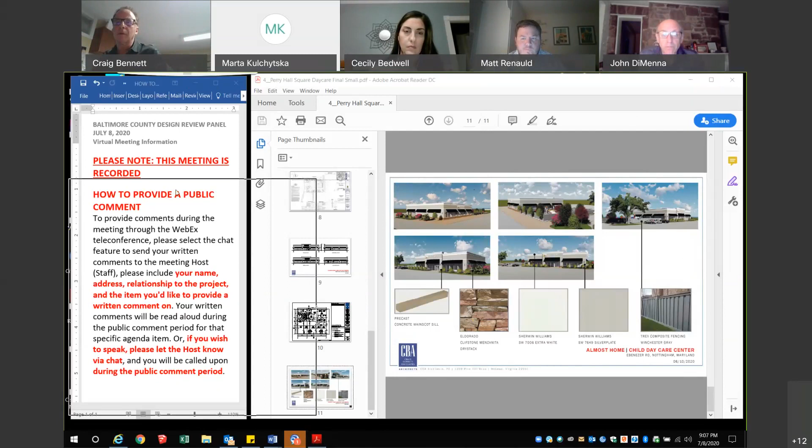Okay, well I can try to answer this one, Cecily. The idea is that parents and guardians drive their children up. If Marta could go to the site plan colored rendering, that would be the best one to talk about. I think it's sheet 4 or 5, somewhere, there it is, 6. The idea is that moms, dads, guardians would park in the 4 or 5 parking spaces just left of the daycare building, adjacent to the outside play area, and they would come out and walk down that front sidewalk and in.

Craig, do you have from your floor plan how many children are planned for this? I don't have the exact number on me, it's like 100, I want to say 120 something. We have 137 people, 137.

Can you hear me? Yes, yeah we can hear you. Is that students, or is that total people? The total people, including staff, I have is approximately 140 people, including staff.

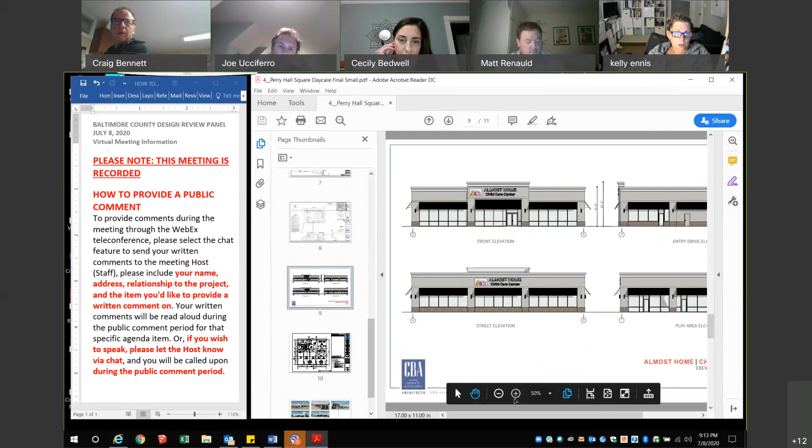That's a logo. That's part of their logo. Okay.

It seems a little - I mean the text of the sign is almost centered but not quite. It'd be nice if that could be centered, and then the graphic portion, the logo, could be reduced so it doesn't cause the signage to be slightly off center. It just feels uncomfortable right now with that element. How is the signage conceived? What are the materials of the signage? Is it channel lit, acrylic letters backlit, or are they pinned off? What are the signage types?

Well, our hope is they would be individual letters, not a raceway. Okay, and then how are they lit? Just lit, yes. What's on the center currently? Are they channel lit letters? It's a mix, but they're all mostly lit, yes.

Okay, those are my comments. Thank you, Cecily. Donald?

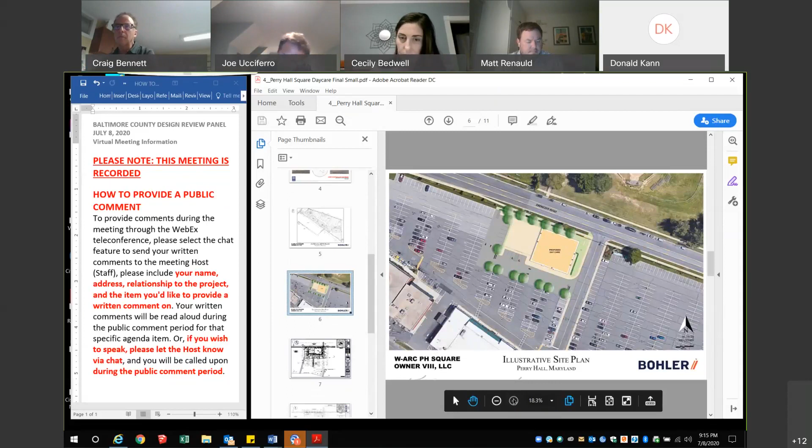Yes, I have a couple comments. I think the discussion about the width of the sidewalk at the front of the building - it's terribly narrow, and I wonder whether if one parking space was reduced heading back toward the main shopping center, you could widen the sidewalk by that additional width. I think with all young people coming out, and particularly people trying to manage that with cars coming by and maybe stacking up almost to Ebenezer Road, the more we can provide sidewalk width there to make it comfortable, and maybe some planting as well, would make a big difference, and I would certainly encourage that.

The other question is the dimension between the pilaster plane and the glass plane, and whether that is set back any distance, other than at the front entrance where it hits a pilaster, particularly on the entry drive elevation where there's no windows. I think expressing those setbacks, where the glass hits it and where the other solid materials hit it, would make a big difference in getting a shadow line there. That subtle change would make it a little stronger. And I agree with other comments that have been made.

Thank you, Don. Matt D'Amico? John, I don't have anything else to add. Thank you, and neither do I.

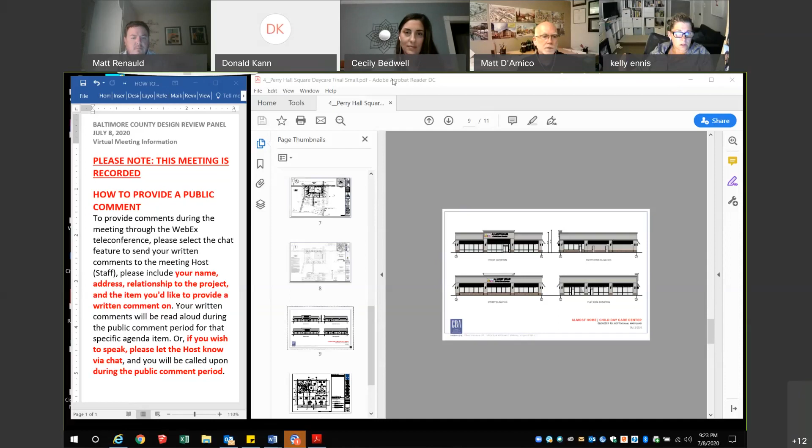All right, thanks everyone, bye-bye. Thank you, everyone. Thank you, Marta. Should I stick around? Should me and Emery stick around? You can catch up in the morning. Yes, it's been a long evening. Unless you still want to work. Okay, thanks Jen, we're the team. Good night. Okay, good night, I just have two quick things.

Okay Brad, so let's stay. Okay, sure. Thank you, oh it's just really, really quick. Brad, I thought we still have- No, they're all gone. Oh, okay, okay. So you did get my message to refer Sebastian to Jeff Livingston, right?